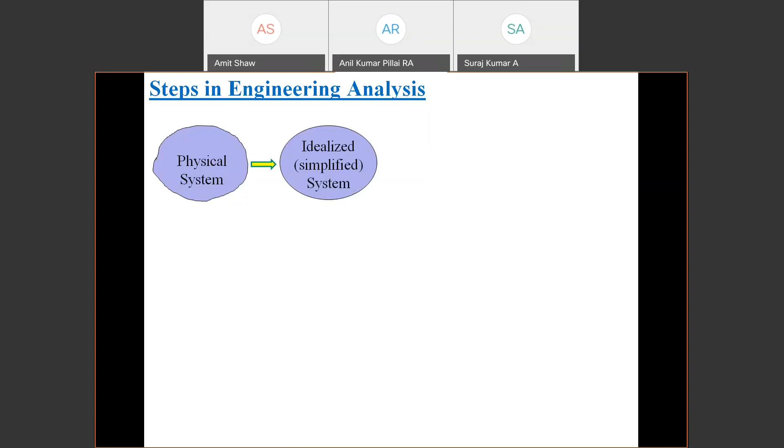Now, once the system is simplified, we express and represent the system through some mathematical model. Once we have that model, then we need to find a solution of that model. Let me put that in a better perspective with an example.

So this is the starting point. Idealized structure is the starting point of analysis. We always start analysis on a beam. We know how to analyze a plate, we know how to analyze a frame. These are all idealizations of some physical system.

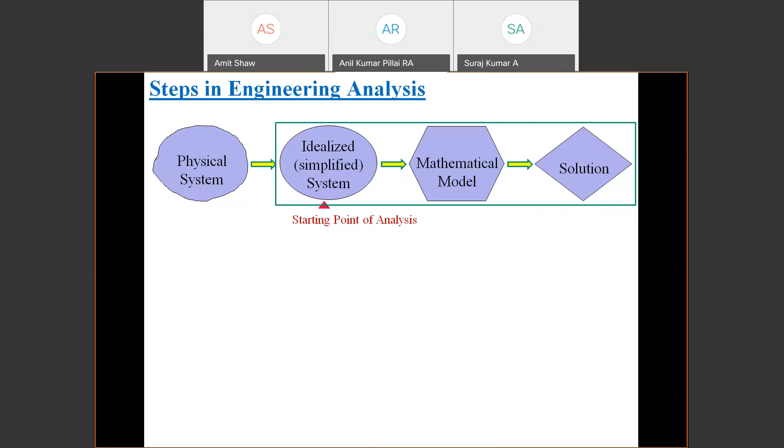Let me give you an example of that. Suppose the physical system is, say in this case, a dam. Then we have an idealized system, the computational model of the dam. Once the system is idealized, we represent it as some mathematical model. In this case, it is the equilibrium equation with some boundary conditions and initial conditions.

And then with this boundary value problem, when we solve it, we get the response of the structure. Response of the structure includes information at various points - stresses, strain - that information we get from the analysis.

Now the important point is when we go in this flow from the physical system to the solution of the system, at every stage we make some assumptions. So when we write the computational model like this, we assume that, in this case at least, the dam is a plane strain problem. So this is an assumption.

Again, from computational model, when we write the mathematical model, we make some assumptions about the boundary conditions, about material property. For instance, concrete - if you look at a mesoscale, concrete is a heterogeneous material, but most of the time we assume concrete is a homogeneous material. So these are all assumptions.

Now again, from the mathematical model, when we solve it, we also make some assumptions. We discretize the entire domain, discretize the equations, and then get the solution. Now, why am I continuously stressing the term assumption? Because assumptions are the limitations of a model, of an analysis framework. Every analysis framework is based on certain assumptions, and these assumptions are essentially the limitations. Wherever these assumptions are not applicable, in those cases, that analysis framework cannot be applied.

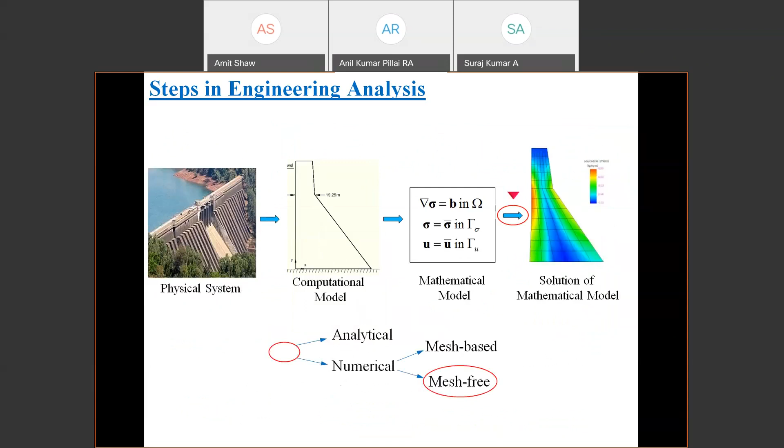So in this presentation, we'll try to address three questions: why mesh-free method, what is mesh-free method, and how mesh-free method works. Why mesh-free method?

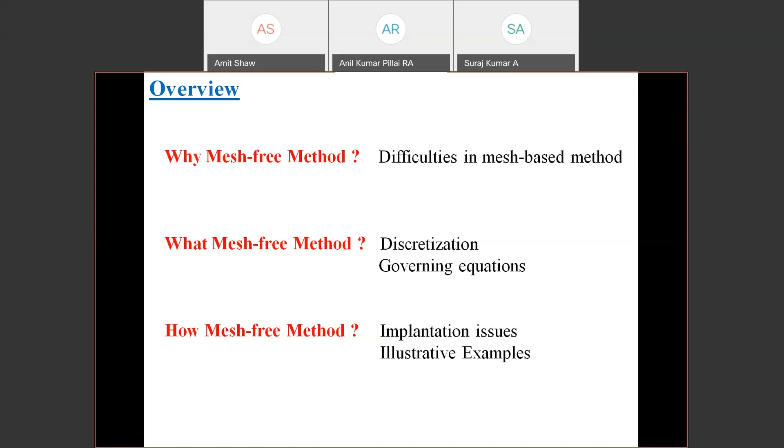We will try to find out sufficient reason to explore this field. We try to find out what are the difficulties associated with mesh-based method, and what limitations we may have for a particular problem when we try to get the solution. Once we understand the motivation, we'll see what mesh-free method is, how discretization takes place, how to solve the governing equation, implementation issues, and then some examples. So let us see why mesh-free methods.

Okay, before that, let me show you some videos. For instance, as I was telling you, with every assumption we slightly deviate from the physical system.

So it is really an irrelevant question whether a model is accurate or not. The very word model itself means it is not an exact representation of the physical system. The question we should ask, whenever we use any analysis or modeling technique, is not whether it is right or wrong, but whether it is useful for a particular context. All models are essentially wrong, but some are useful, and we try to use only those modeling techniques which are useful for the given context.

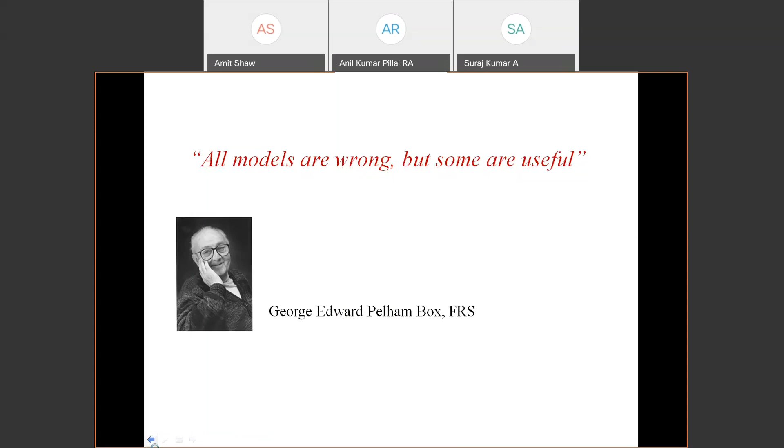Now, to understand the motivation of mesh-free method through a practical example: suppose I want to study and design a structure under blast loading. Before we do so, we need to understand how a structure may respond when subjected to blast. I, or my student, tried to model the entire structure under blast loading using LS-DYNA software. I'll show you what kind of behavior we observed from the analysis. So I'm going to play a video.

I see this video. So this is a bridge. We have taken a small, simply supported bridge, and put some explosive just below the deck, then the explosion takes place. Now, what we'll observe in this video is how, after the explosion, damage initiates in the structure and how the damage propagates, and what happens to the structure as it does.

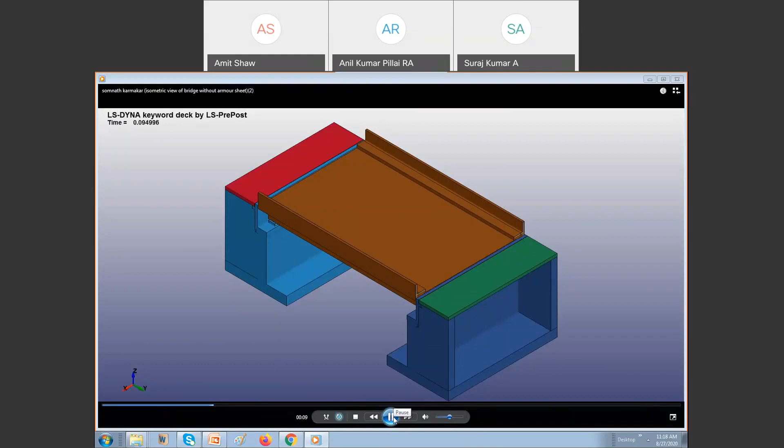These are the damages. They start from here. The initiation location of the damage depends on the position of the explosive, standoff distance, and intensity of the explosive. But for this given choice of parameters, the damage starts here and then propagates, and you can see how it propagates.

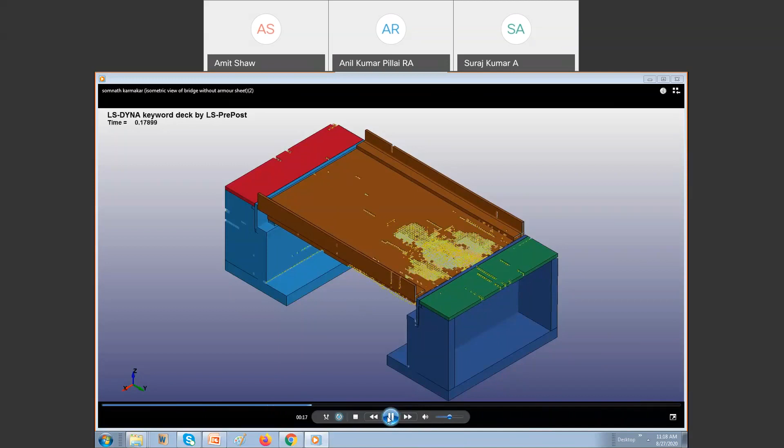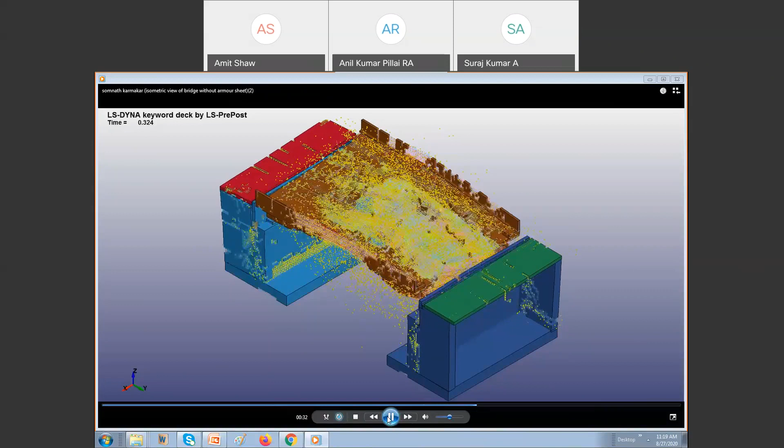You can see all these dots, the yellow dots, which are essentially the fragmented parts of concrete. And if you look at these lines, these are essentially the reinforcements. So you can see this is the way the structure actually responds. This is how this simulation will come towards the end of this presentation.

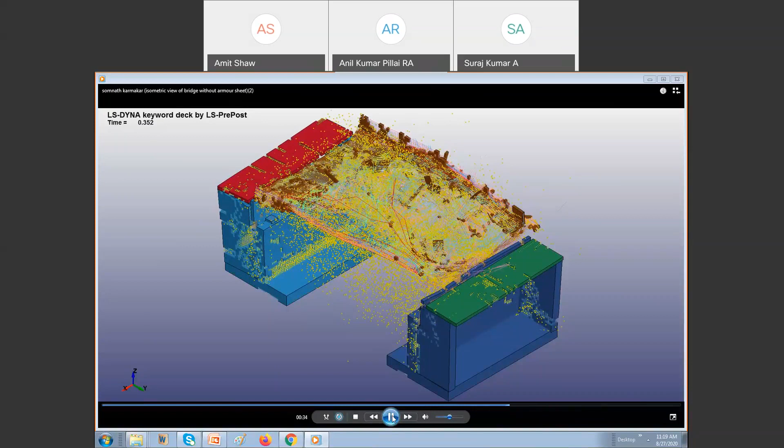But the point I want to make is that whenever this kind of behavior occurs, methods which rely on mesh have a limitation. I believe you are all familiar with finite element method. If you recall the process we follow: we have a domain, a structure, we discretize into elements, but the elements are connected together at the nodes, and they remain connected. We do not allow separation of elements in the classical form of standard finite element formulation. But when this kind of fragmentation or failure takes place...

...then you do not have the luxury of keeping the connection between elements. There has to be a separation between elements. The computational framework used must allow separation of those elements, otherwise you cannot model the structure, you cannot model fragmentation. But methods based on elements really cannot do so easily. They can model it to some extent with additional enrichment, we'll come to that point as well. But by and large, it is very difficult to model this kind of behavior using finite element method or methods which rely on mesh.

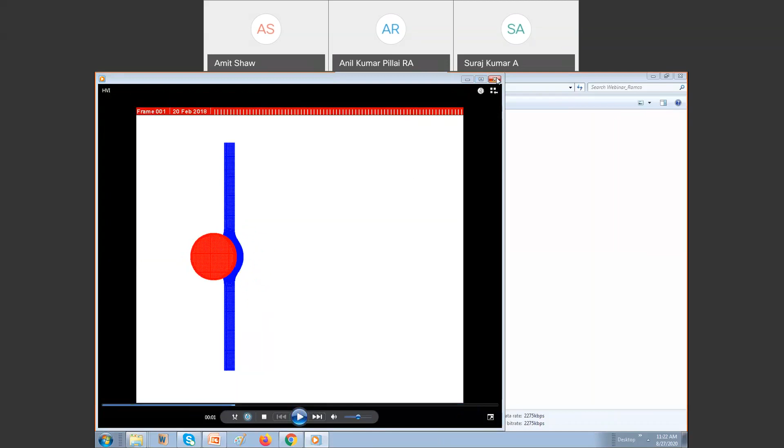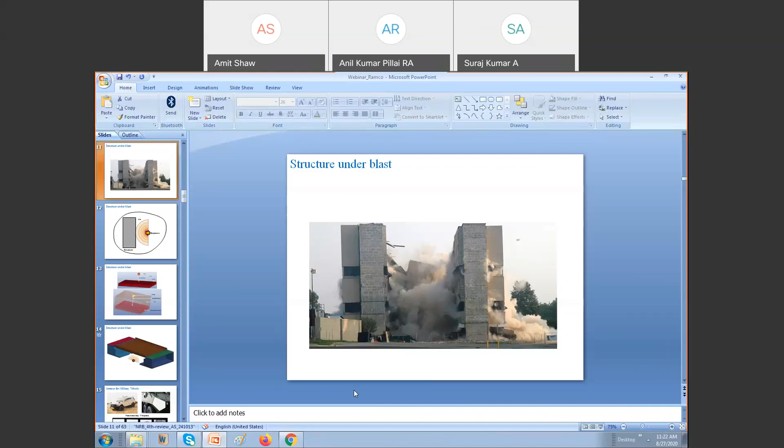Now the point is, in those places it is difficult to use finite element method, and therefore we need a method which does not rely on elements. The choice is element-free method. Remove the element, or remove the mesh, from the formulation, and it becomes mesh-free method. That is the topic of this lecture.

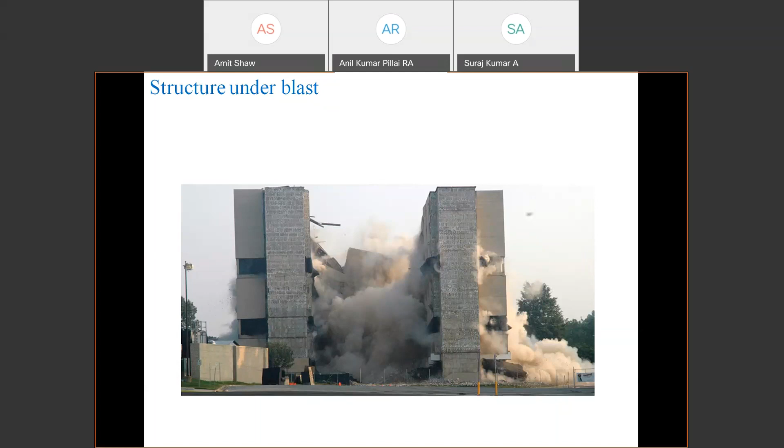Suppose I want to model it. This is the physical system, the actual structure and actual blast. As I said, the analysis step is: we have a physical system, then we need to idealize the system. This is the idealization - this is the structure, and this is the explosive. After the explosion, the shock wave generates and propagates through air and hits the structure, and then the medium is here. So this is our system.

Now there are many ways you can understand this system. I'm just going to give you some examples. Suppose I want to analyze this system - what are the possible ways we can analyze it, some examples.

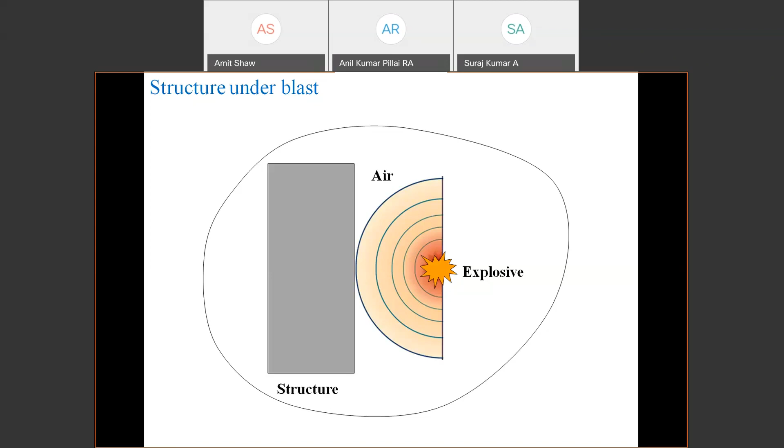The second idea, another idealization, would be to model the structure, air, as well as the explosive. You model the explosive with something, allow the explosion to happen, allow the shock wave to generate, model the air and allow the shock wave to propagate through it, and then eventually the shock wave hits the structure and you get the response of the structure. So either you model only the structure and apply pressure on it, or you idealize the entire system - explosion, air, and structure together - and do the simulation.

But again, what idealization to follow also depends on what kind of response we are looking for. And based on that, whether a particular idealization is useful in that context or not - based on that, we need to idealize.

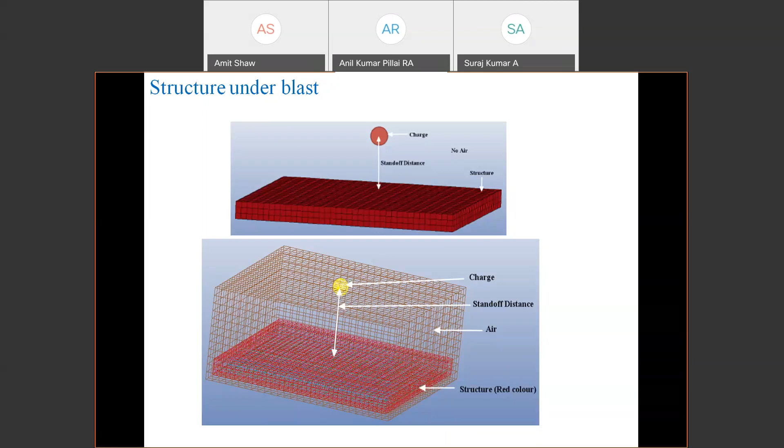Now, this is finite element discretization. The entire structure is discretized with elements, and when we tried to analyze the structure under blast loading, we had a problem - we could not model it. The simulation I showed you is not just finite element; there is another method we use, I'll come to that point. But when we tried to model only with finite element method, it was very difficult to model.

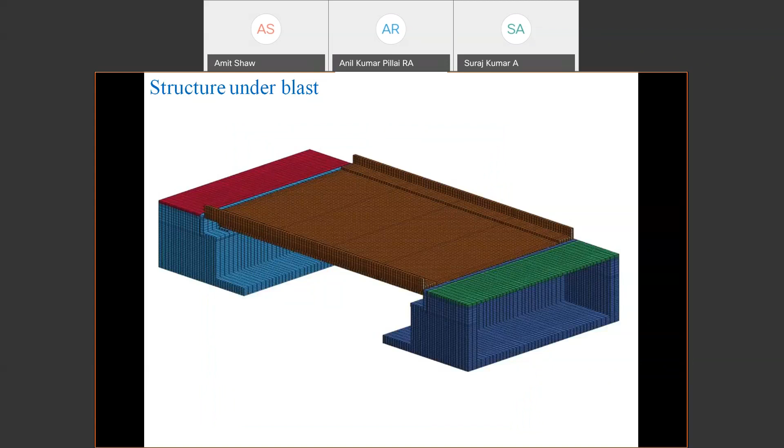Other examples - see, the examples I'm showing are from my interest, but you can correlate similar kinds of problems to many other fields as well. For instance, the armor we use for military vehicles - these armors are subjected to impact of bullets and blast loading. Whenever a bullet comes and hits the armor, there is fragmentation in the armor, failure takes place. If I want to model it for the design of armor, I have to analyze it, I have to do the simulation. But when we try to do the simulation, the classical methods which rely on mesh are very difficult to implement in this context. This is another example.

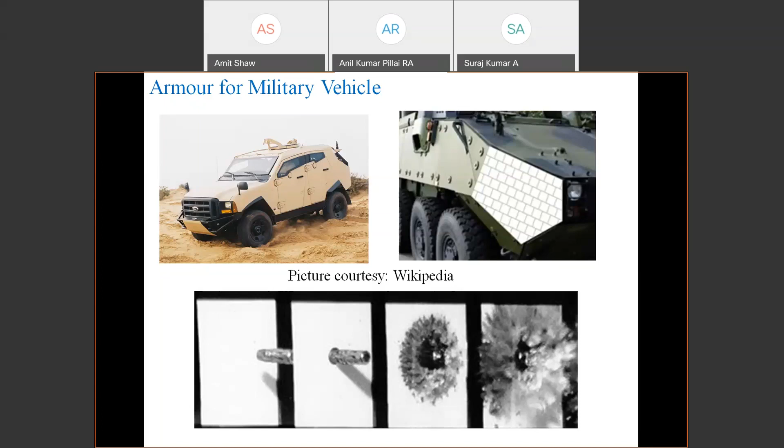Again, you see the example - we as human beings are, popular or unpopular whatever you may say, polluting things, right?

Why is space debris important? Suppose you want to send a satellite into space, and that satellite is hit by space debris. These debris are very fine particles moving at around 10 kilometers per second. At that speed, they may cause significant damage to the structure. So if a satellite is hit by space debris, considerable damage may occur. When we model the movement of a satellite, we need to keep in mind the debris environment - where the debris is, at what speed it may come, what the density of debris is, and whether the area is safe. Otherwise, it will cause significant damage.

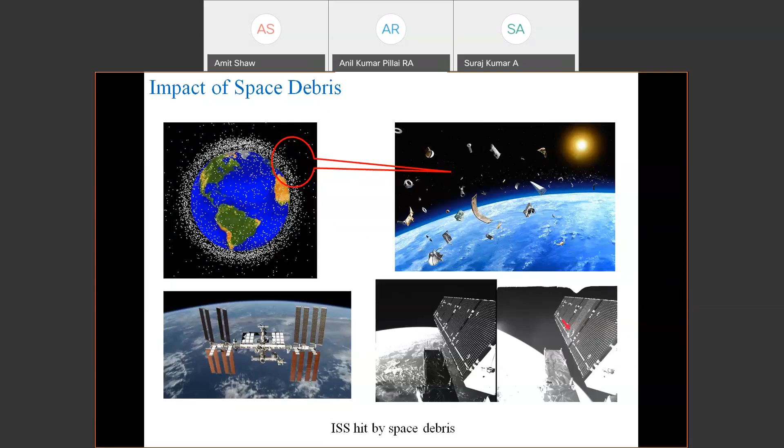Just to give an example, a few years back the International Space Station was hit by a small piece of debris, but luckily it hit the solar panel. You can see a small white dot here, which is the damage caused by the debris. But as I said, luckily it was the solar panel - had it been the main structure, it would have been a disaster.

Another question is how to understand how a structure responds. When we talk about a structure, it could be anything - not just a truss, a frame, or a building. Anything made of small pieces that serves a certain purpose can be termed a structure. So if there is an impact of debris on a structure, how would the structure behave? That information is important, because only with it can we design the structure and design a shield for it.

For that, numerical simulation is important. What methods do we have to numerically simulate it? If we go back to using finite element or mesh-based methods, there is a limitation, as we have mentioned many times in this presentation. So we have to find an alternative technique, beyond the mesh methods that are available.

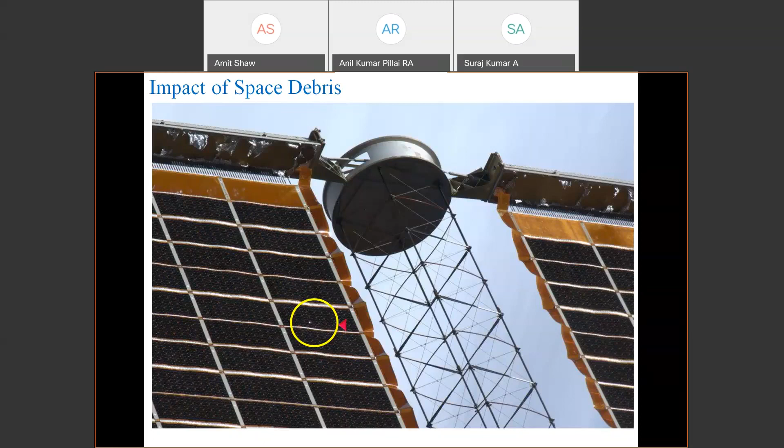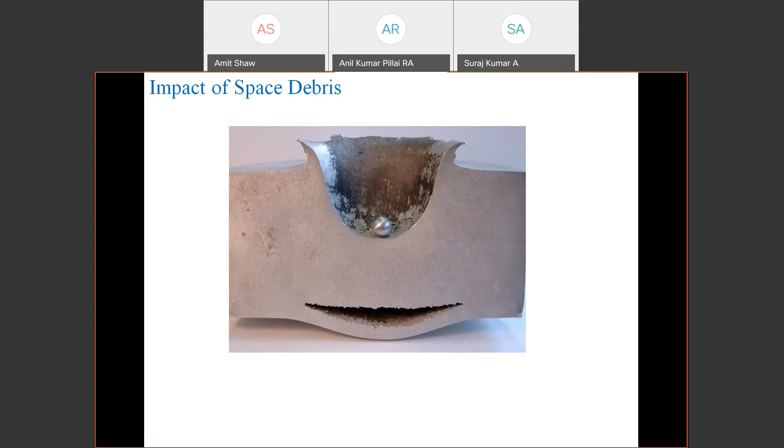The second section I was talking about, a plate impacted by a sphere, is essentially the simulation of this problem - this is the plate, and it's hit by a small sphere. When we do this simulation, I'll zoom into that part and show you the problem. When you try to simulate it using an element-based method, you see there's huge distortion of elements occurring - the elements get distorted severely.

At these points, when you have a severe distortion in the element, the accuracy of the solution suffers. One of the premises in element-based formulation is that the element must satisfy certain geometric criteria. If they are severely distorted, those criteria are violated, and the final solution will be inaccurate. So we have to deal with this distortion.

There are many ways to deal with distortion, but when we talk about this kind of problem, all these techniques fail to address satisfactorily the kind of problem we are interested in.

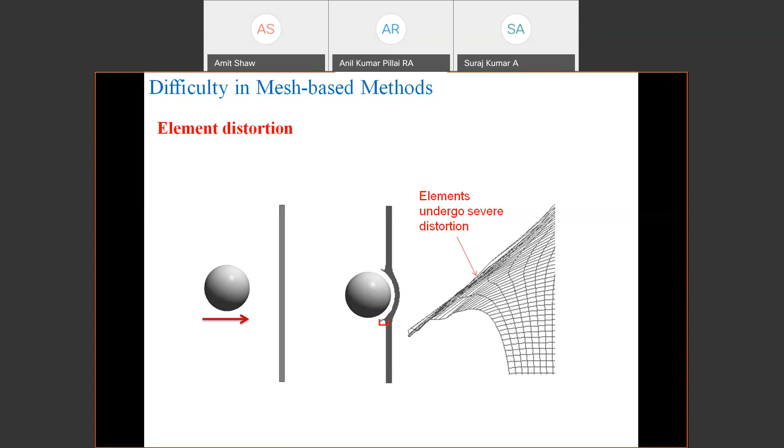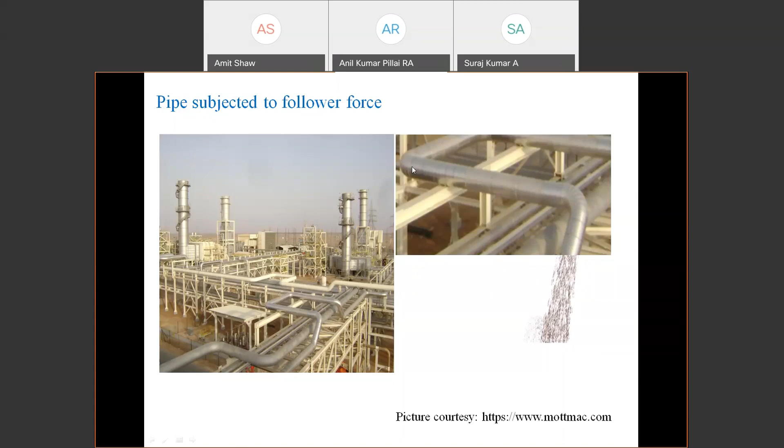Now when we try to simulate it, the simulation will look like this. Of course, a concrete or steel structure would not allow this kind of deformation in reality — it is not to scale. This is the actual deformation that this beam, or this kind of structure, may encounter. Now I want to simulate it.

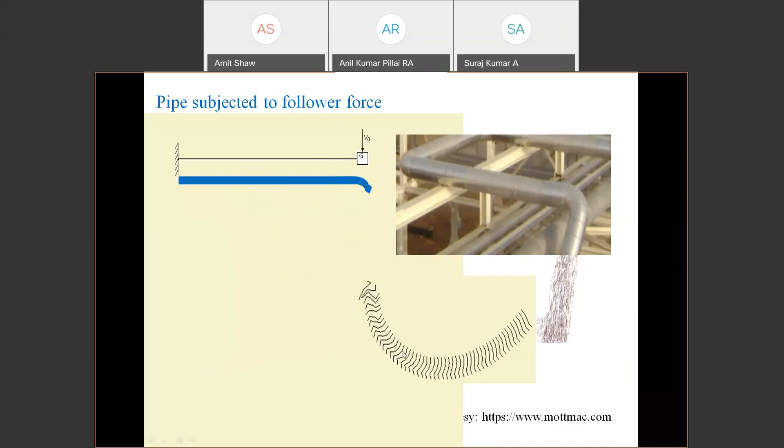But then what happens? You see these lines representing the thickness of the beam — these thickness lines become so severely distorted. So when you try to model it using the finite element method or an element-based method, because of this distortion, you may get significant problems in the computation.

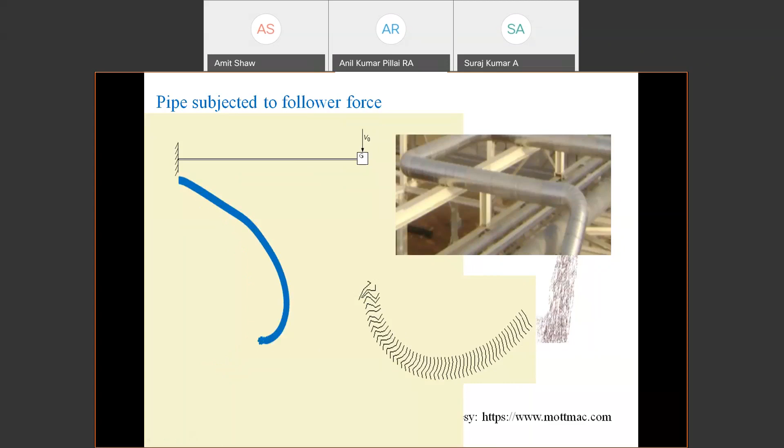So these are some of the motivations, some reasons why we must look beyond the classical technique and explore the possibilities of a different class of method which can be used for certain classes of problems where conventional methods cannot be used very satisfactorily.

Now, before exploring these possibilities — if something goes wrong in our computer, we don't just go to the market and buy a new one, right? We try to repair it. If we find that the computer reaches a state where repairing is not possible, or the repair cost is huge, only then do we think of buying a new computer. So the first thing is always to find a way to repair the framework you have.

By the same analogy, there are some limitations in our computational framework, but instead of looking for a completely new alternative technique, why not try to repair the existing technique and see whether, with that repair, these methods can be adapted to this kind of problem. So there are some repairs available in the literature.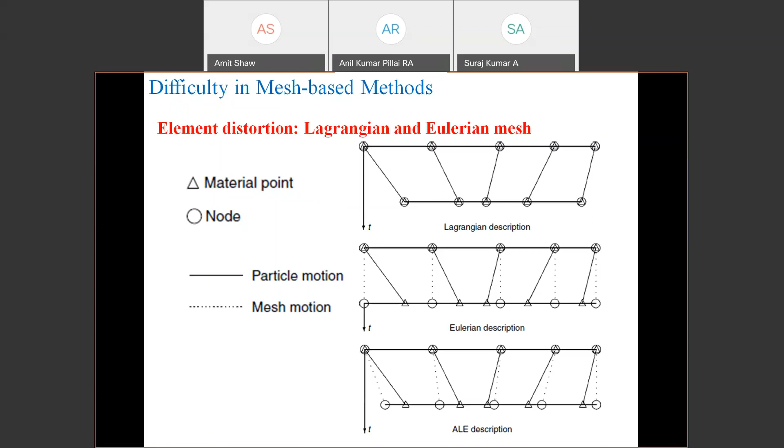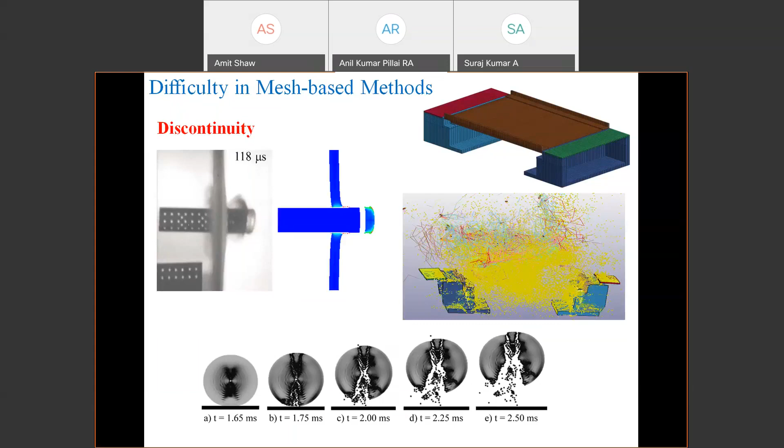Now another difficulty in element-based methods, as I've highlighted several times, is modeling fragmentation, crack propagation, and the discontinuity that the structure encounters. In order to model that discontinuity, there is a technique available in the literature called XFEM, extended finite element method, where enrichment allows your computational framework to have a crack within the element, allowing material separation to happen.

XFEM has also been developed for some time. Some software like Abaqus has a module for XFEM, but we are not talking about one crack or two cracks. We are talking about the example of a structure under blast loading, how damage initiates, propagates, and finally leads to complete failure of the structure, including material separation and fragmentation.

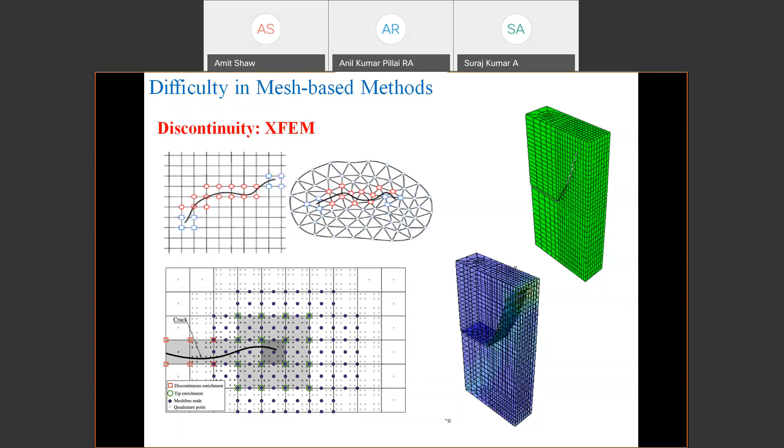Now in those kinds of behavior, XFEM again may not be applicable to those kinds of structures and behavior.

So up to this point, we tried to convince ourselves and find sufficient reason to look beyond the classical technique. The summary is: there are certain classes of problems where conventional mesh-based methods are difficult to implement or apply, and in those cases we need to look beyond this conventional technique. That is why we are doing this exercise on mesh-free methods.

Now let us come to what mesh-free methods are. As the name suggests, mesh-free methods started long back, around the 1970s, and now we are in 2020, so it has been almost 45-50 years. Over the last 40-45 years, several variants of mesh-free methods have been developed.

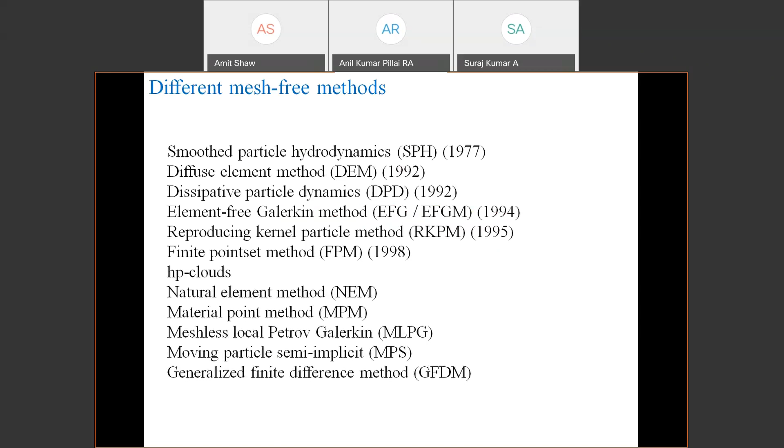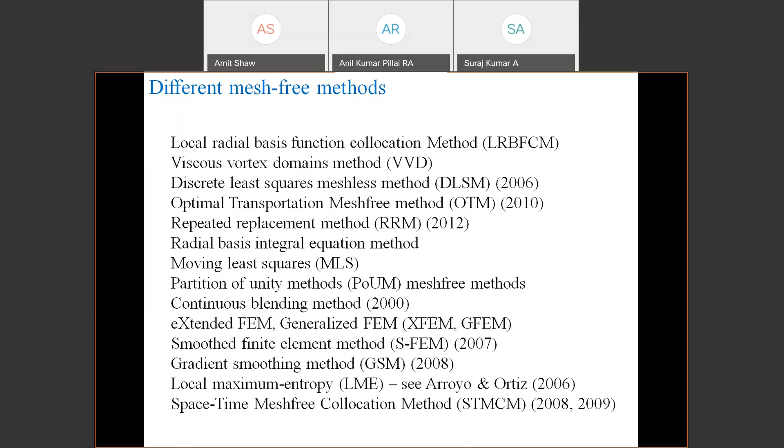I'll just browse through a few names. These are just a small subset of the entire set of mesh-free methods available in literature, but they are not very different from each other—they are all premised on similar assumptions, so there is a common link among them. These methods are popular and widely used in simulations, and commercial software like Abaqus and LS-DYNA have incorporated methods like Smoothed Particle Hydrodynamics, or SPH, as one of their modules. We'll highlight different aspects of this method.

As the name suggests, mesh-free method means absence of mesh—there is no mesh. So we have a structure like this, say for instance a plate, and if I analyze this plate using the finite element method, this is the discretization—the element discretization of the domain.

In mesh-free, we just remove the elements. So in finite element discretization we have elements and nodes, all connected with each other at the nodes. In mesh-free discretization, we remove the elements from the system, so what we're left with is just a set of nodes, or particles—particles being the common term used in this class of methods. So the first difference between mesh-based and mesh-free methods is that mesh-based uses discretization through elements, but there are no elements in mesh-free methods, only particles.

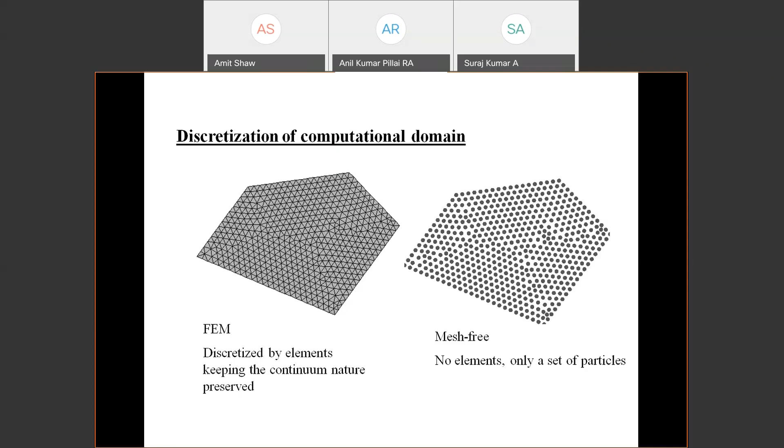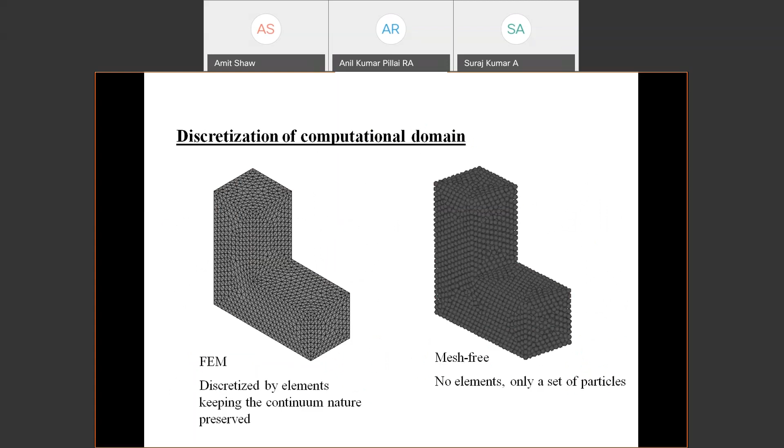Now one point I want to highlight is that when we say it's a beam, a plate, a shell, a column—these are all structural idealizations. There is nothing like beam or column in nature; nature doesn't understand what a beam or column is. For nature, everything is a three-dimensional object. It is for us, for our computation and analysis, that we give this idealization. Now, one important thing about mesh-free methods is that they do not rely on those kinds of idealizations.

Every structure now is a collection of points in three-dimensional space. Once we have discretized the structure by representing it as a set of points in three-dimensional space, the next question is how these points or particles interact with each other in order to have a deformation, in order to get the load transfer from one part to another.

These points must interact. This interaction in mesh-free method takes place through a kernel function, but before that, it takes place in finite element method. In finite element method, we defined shape function.

The shape function essentially gives you, if you have several points within an element, and every point has a variable defined, then the shape function allows you to find out the variable at any arbitrary point in the element. So Ux at the point could be velocity, it could be displacement, it could be stress.

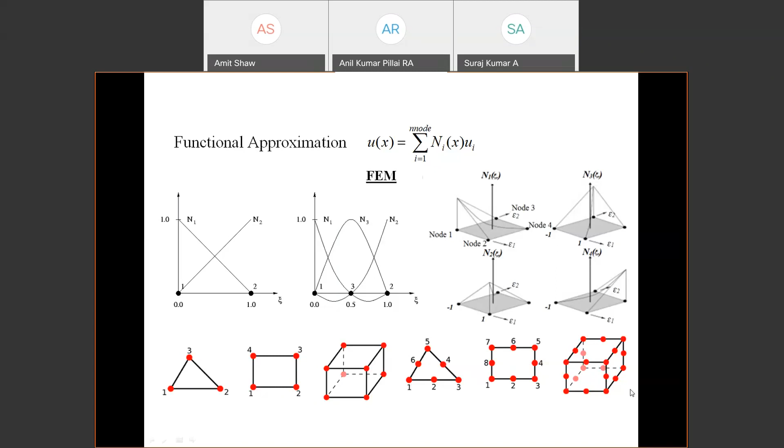Now you see, this is the function, and these are the points, and these points will interact with each other. It is very similar to finite element method, where ui's were the values at the node, and instead of wi's, you had Ni's as the shape function. In mesh-free method, ui's are the values of this particle, and wi's is the kernel function.

This is the kernel function, and ui's give you the value of any function at any arbitrary location. So this is how any field variable, displacement, velocity, or any field variable, can be represented.

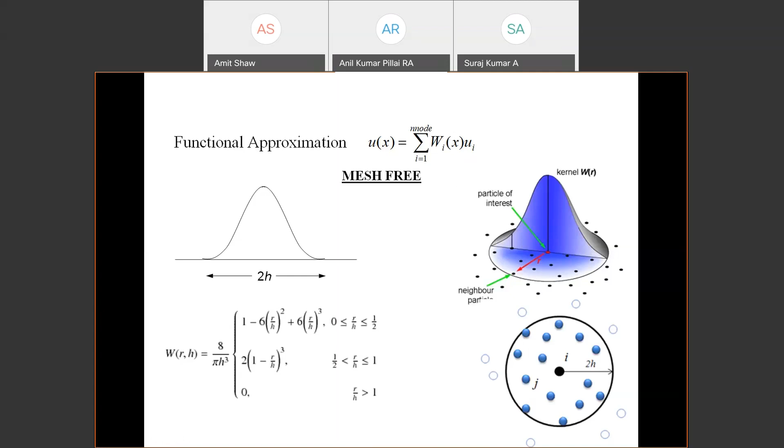So now in a domain you have several points. Wherever you want this interaction to happen, you take the kernel function at that particular point. One point will interact with its neighboring points. One point will not interact with all the points within the domain, only with the neighboring points.

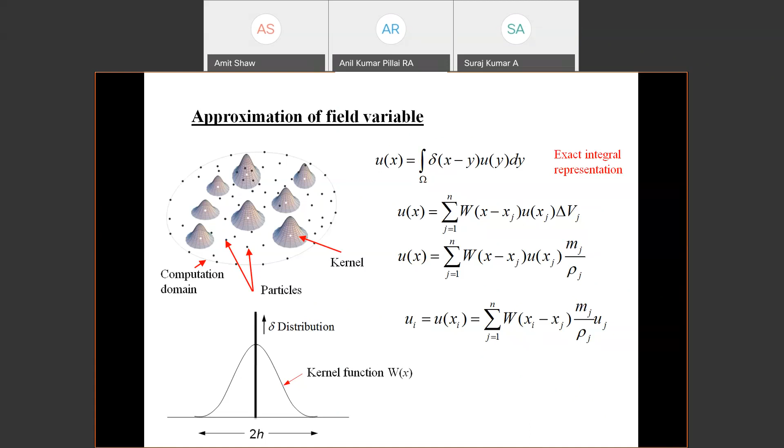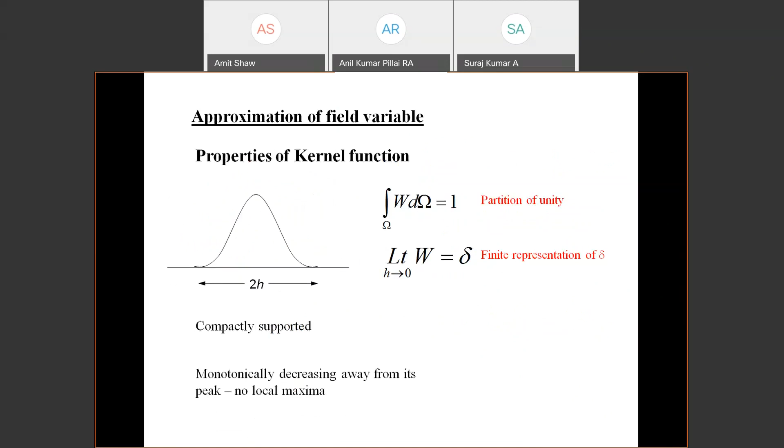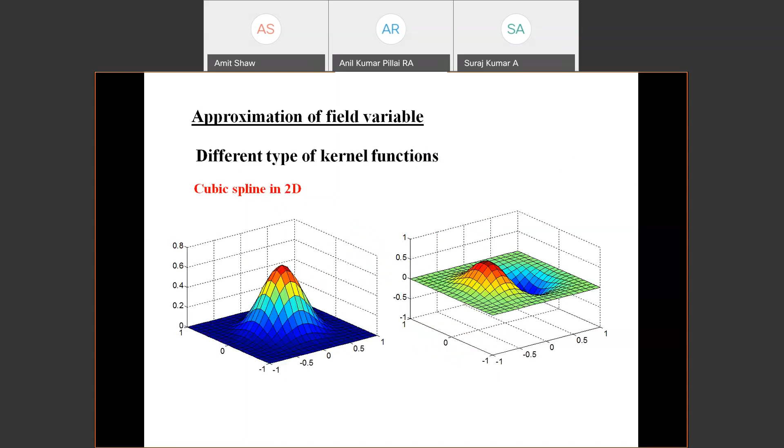So again, if we recall the flow in engineering analysis: physical system, then idealization, mathematical model, and the solution. Physical system we had idealization. Now in mesh-free method, every physical system is idealized by a set of points in three-dimensional space. Once that idealization is done, the next thing is the mathematical model. What are the mathematical models? The equilibrium equations, the conservation equations: conservation of mass, conservation of momentum, conservation of energy.

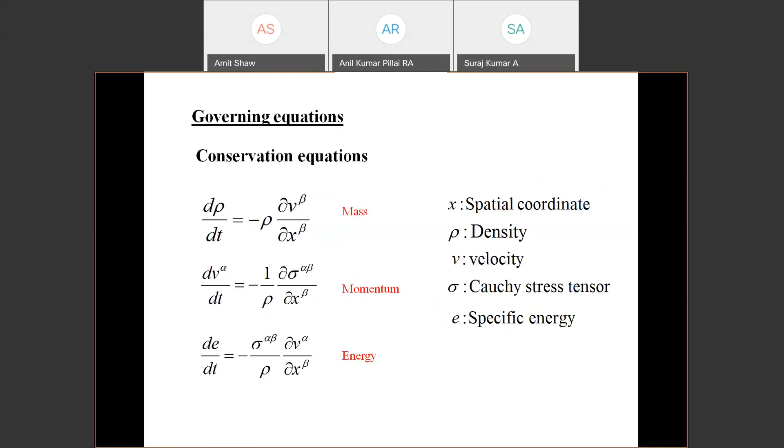The derivatives in the conservation equation can be represented by the kernel function, the same way it is represented in finite element method. Let us not go into detail of this equation. Our idea is to get an overview of this method.

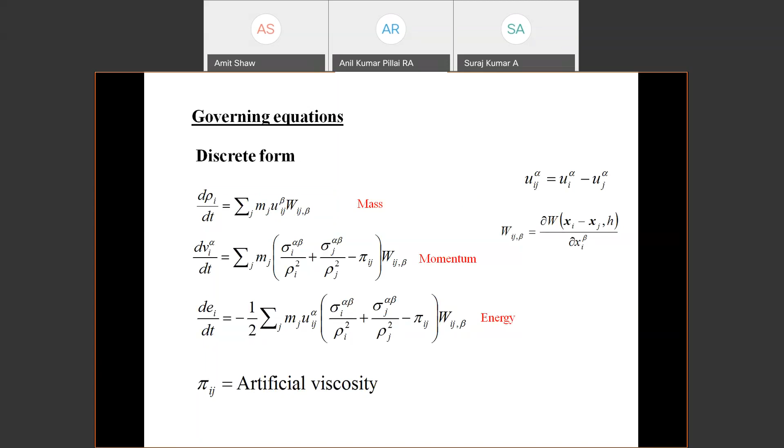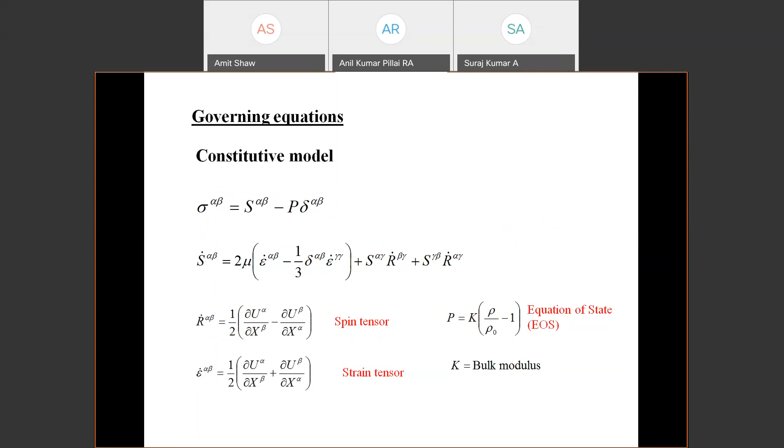So finally, when you substitute all these expressions, along with your conservation equation, we need a constitutive model. What is constitutive model? It is the relation between stress and strain. If you apply a load on a structure, stress and strain are generated, and then how the stress and strain are related to each other.

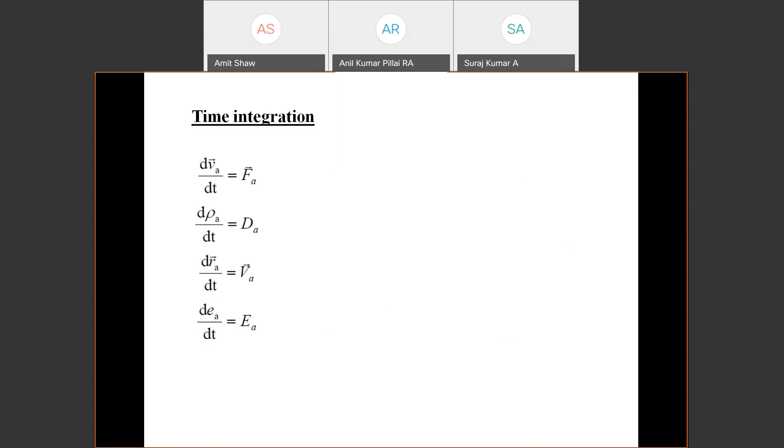So once you have this model, then finally you have to integrate over time if you are doing some dynamic simulation. Let us not go into the detailed intricacies of the mesh-free method, which took several decades to develop. We do not really expect to discuss everything in a one hour lecture, but the idea here is to have an overview of this method, what kind of simulations it can handle, and what is the capacity of this method.

This is one example called the Taylor bullet. It's a very straightforward example. You have a cylindrical rod, and the cylindrical rod impacts a rigid wall, and finally this cylindrical rod deforms like this. The red is the finite element method, and the dots are the simulation results.

The reason I showed you this is that these simulations can be done using finite element based methods, but we should understand that for a problem where a solution can be obtained from mesh-based or element-based methods, if we apply SPH to those problems, what is the quality of the solution? The solution will form, and this is just to show that they match closely.

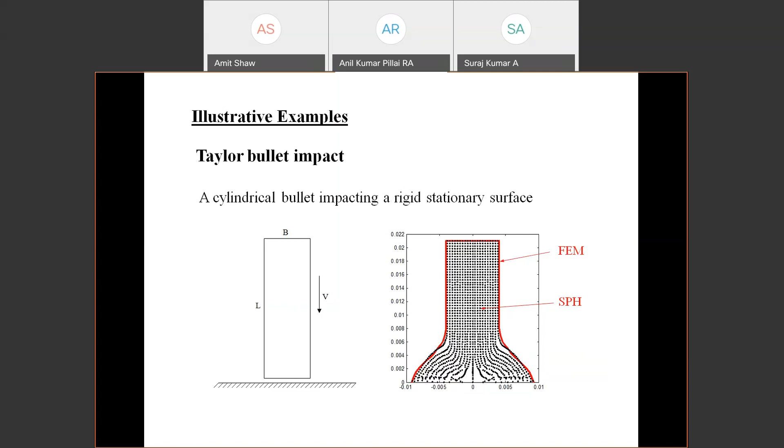Now these are examples that actually show the real capacity, the real capability of this kind of penetration modeling.

If I have to give you a physical example of this problem, this is a very common problem in the oil industry. Suppose you want to make a drill into the earth's surface, for oil exploration or any kind of exploration - this is very common in mining too. Once you make a drill, you want a certain kind of trajectory - at what speed I send the impactor, at what speed I allow the impact to happen, so that I get a certain kind of penetration. If you want that kind of information, we have to simulate it.

We cannot model the entire earth's surface, but we use a domain that can fairly represent the earth. If waves are generated from here, the wave doesn't get reflected, so it fairly represents the earth's surface. These are the penetrations at different impact speeds.

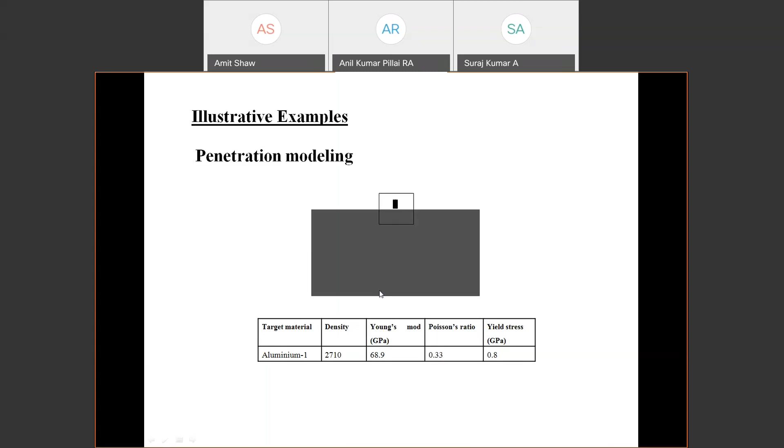The first one is 1 kilometer per second, and as you can see, this is the penetration. This penetration is very difficult to model using analytical methods - some simplified empirical and analytical methods are available for the depth of penetration. When you compare the results of this information, you can see they fairly match.

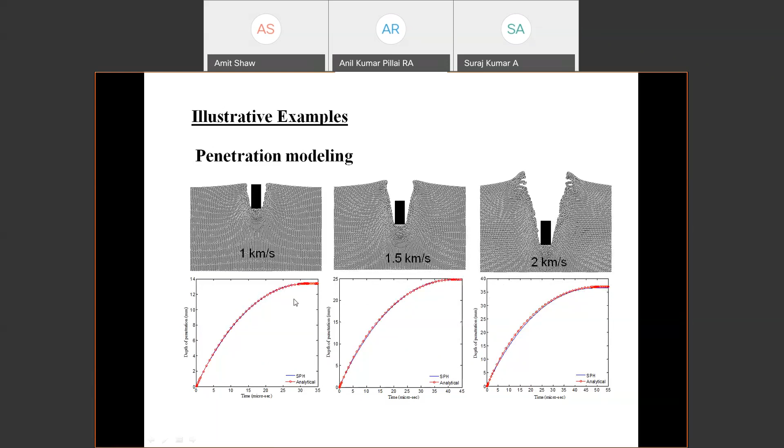This is the problem I was talking about - I was giving an example of a pipe network system. This is a very classical problem called the Parkes problem, introduced by Parkes in 1950, almost 70 years back. But this problem is still relevant because it is a very good example for exploring different classes of methods. This is the result obtained from SPH.

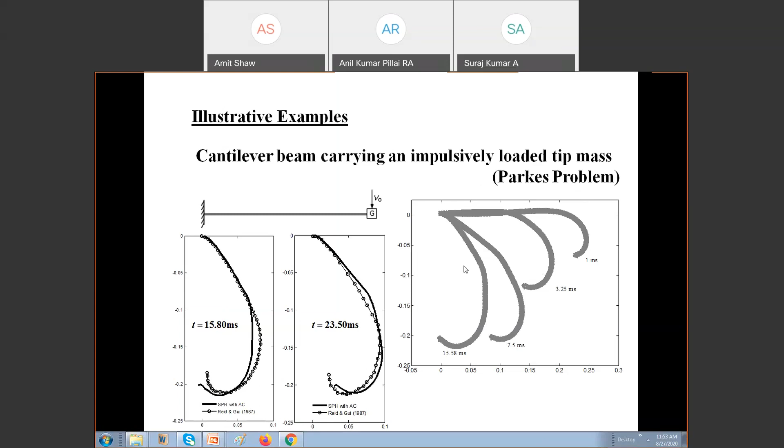Now we are interested in modeling cracks and fragmentation. Let us see how crack and fragmentation can be modeled in the SPH method. You have a set of particles, and every particle interacts through a kernel function. We have used a concept called pseudo spring analogy, which was developed by one of my students.

The idea is to consider a spring between each particle. As the particle structure undergoes deformation and damage initiates, the spring also accumulates damage. When the damage reaches a critical value, the spring breaks, indicating crack formation - material separation has taken place. It's called a pseudo spring because these springs don't contribute anything to the stiffness of the structure; they're only used to check the level of damage and determine whether particles interact or not.

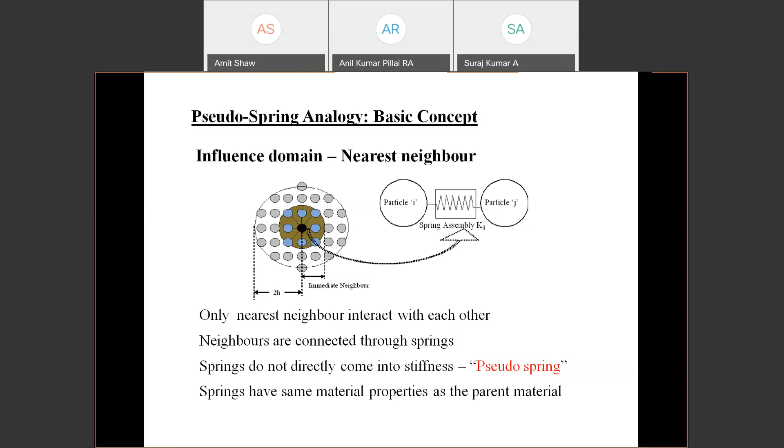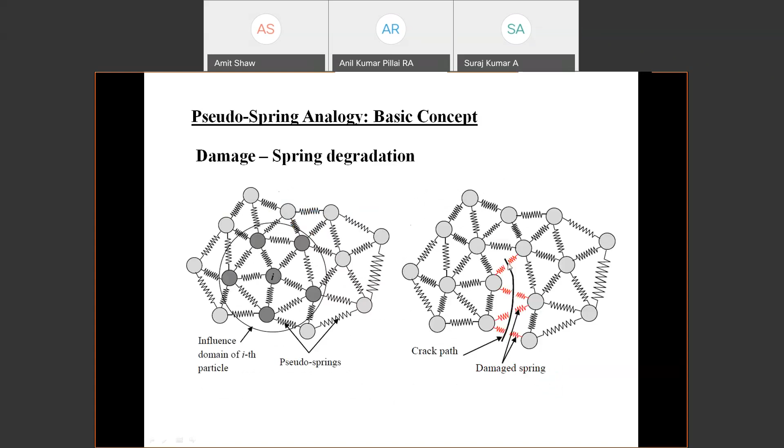So these are particles connected through springs, and some of the springs are broken - this series of broken springs gives you the crack path. This is just one example of how you can calculate the damage of the spring. Damage can be defined depending on the material, and it can be defined in many ways.

Now, this is one way of calculating the strain at this point, and if your criteria is strain based, which is not a very accurate criteria but just giving an example, then damage is defined as this, and if this damage value reaches a critical value, which is 1 in this case, then the spring is broken.

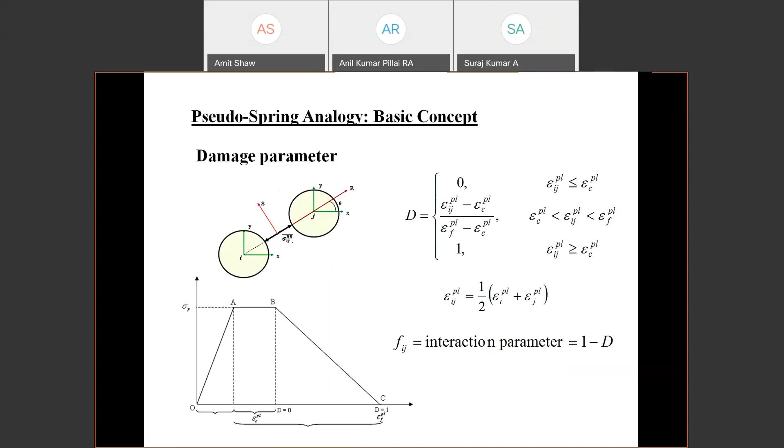Okay, so let us see what is the capability of these methods.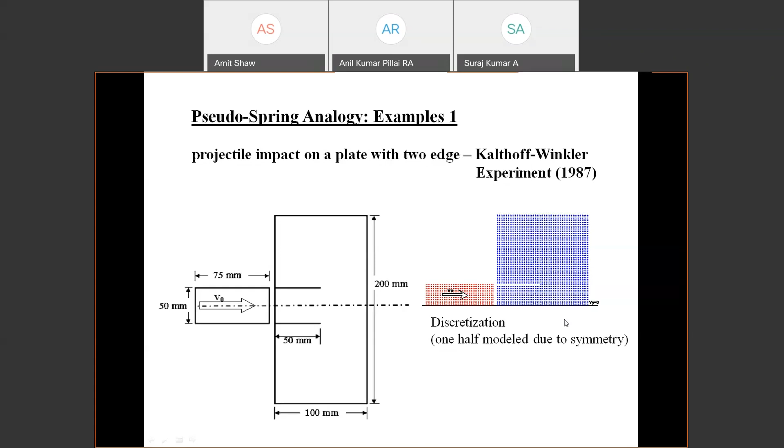Now you see these dots are the crack paths obtained from the simulation. From the experiment, it was observed the crack angle is around 70 degrees, whereas what is observed through simulation is around 67 degrees, which is quite consistent with the experimental observation.

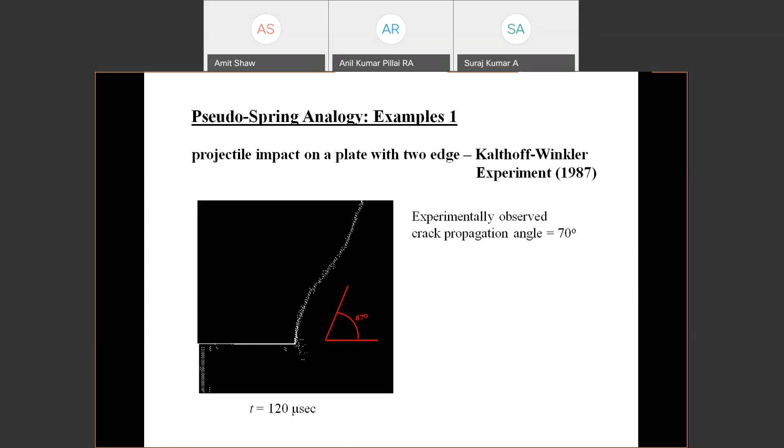Now, this is another experiment done by Ortiz in 1999. This is a supported concrete beam. We have a notch at the center, and in this case, with an eccentricity, and this beam is hit by an object at the mid-plane of the beam.

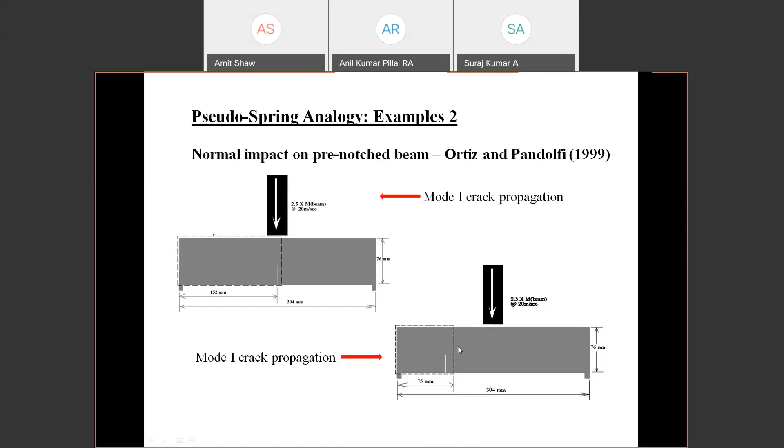In this case, by intuition, we can say that after the hitting, the crack starts from the tip of the notch and then propagates vertically. In the second case, by intuition again, we can say the crack forms again from the tip, but then the crack is not vertical in this case, the crack will be inclined.

So these are the patterns obtained from the SPH simulation, which are very consistent with intuition. In the first case, the crack propagates vertically, and in the second case, the crack is inclined, which is again verified through the experiment given in the paper by Ortiz.

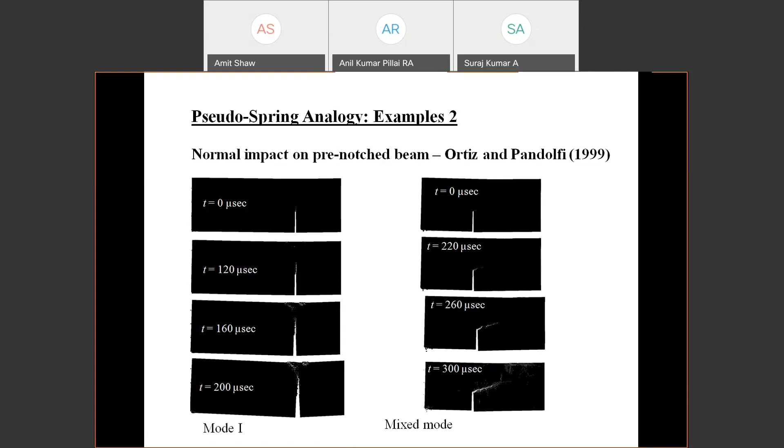This is another experiment, the clamped beam, again hit by a projectile. Experiment done by Chen, and it was an aluminum beam.

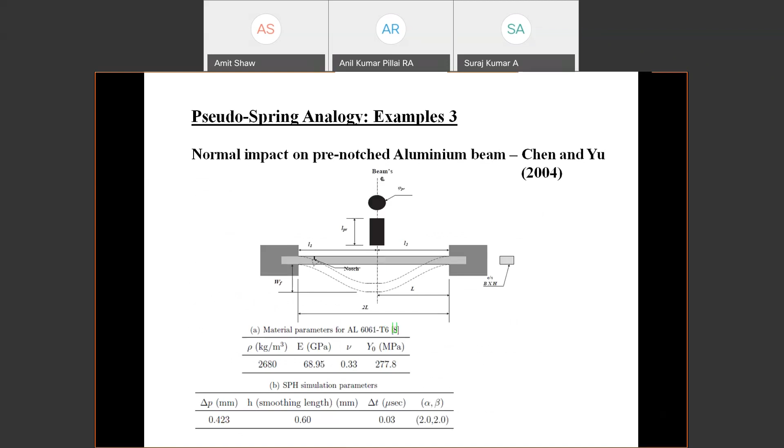So you see, this is the final deformation at different speeds obtained from simulation and obtained from other analysis, and we can see that it is quite consistent.

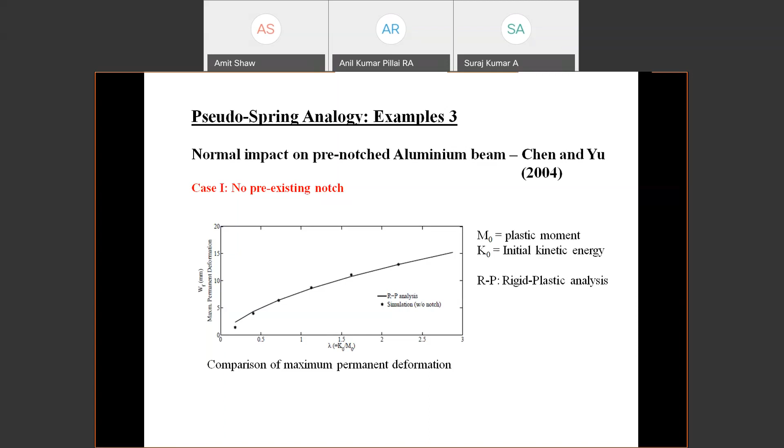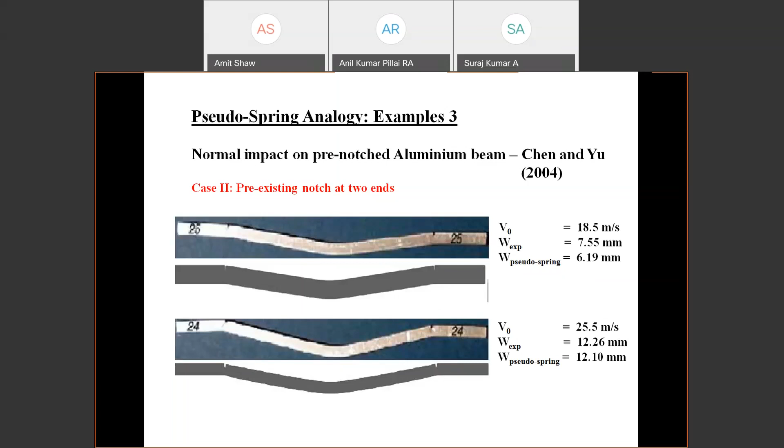These are interesting. The first figure is obtained from experiment, and the second figure, just below the first figure, is predicted from the numerical simulation. So if there is a notch at the fixed end, clamped end, these are the deformations. Now these deformations are again quite consistent with the experimental observation, and the predicted response is very consistent with the experimental observation.

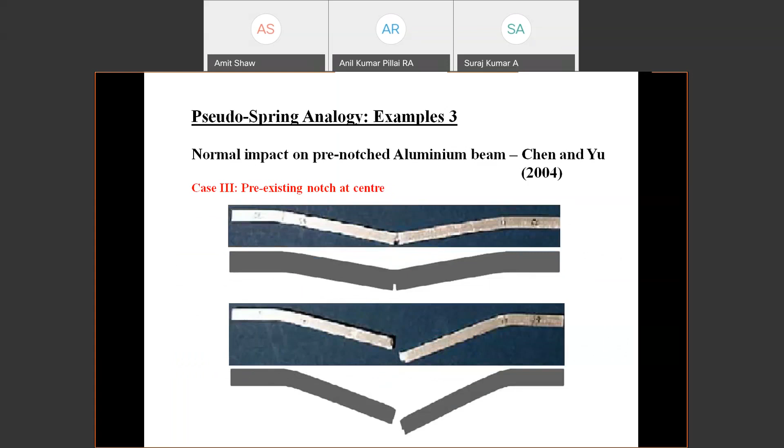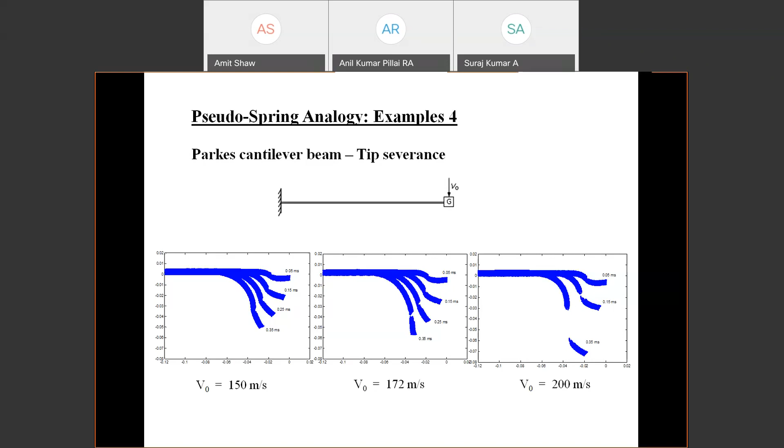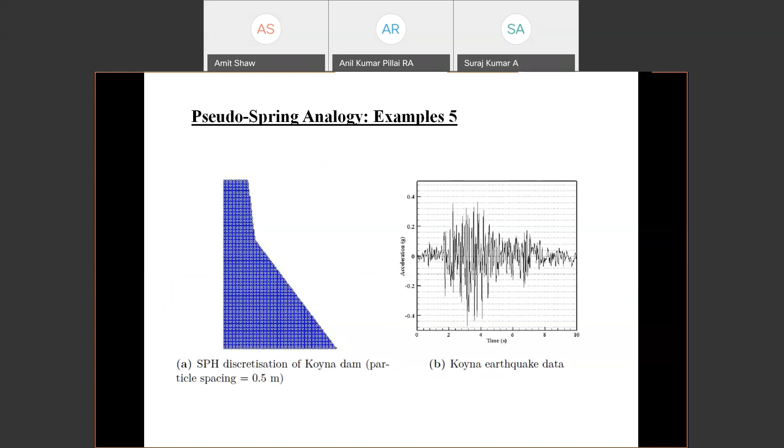But to get this crack pattern in element-based methods, you have to do a lot of additional things like enrichment with XFEM. But sometimes with those enrichment techniques, it becomes very difficult to model interaction of cracks when the number of cracks is very large. But these methods are naturally equipped to deal with or handle this kind of situation.

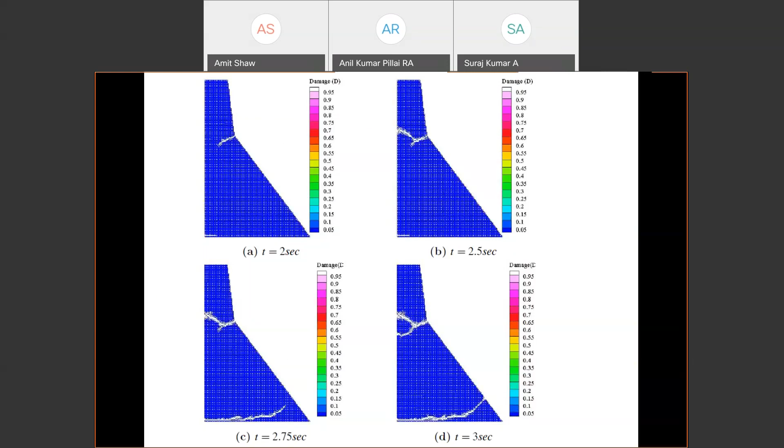Okay, so let us finally summarize what we have discussed. As I started with, what is this? Idealization is one of the important steps in any engineering analysis. If you see the physical system, then idealized system, mathematical model, and the solution. Idealization, representation to a mathematical model, and simulation, we call together structural analysis.

If you're talking about those class of problems, some of the methods which are very well known, widespread, name a field, whether in engineering or science or some other field, there is an application of element-based method. But even in all these, there are a very small set of problems where the application of those methods is very difficult. In those problems, we need to look beyond the classical modeling technique.

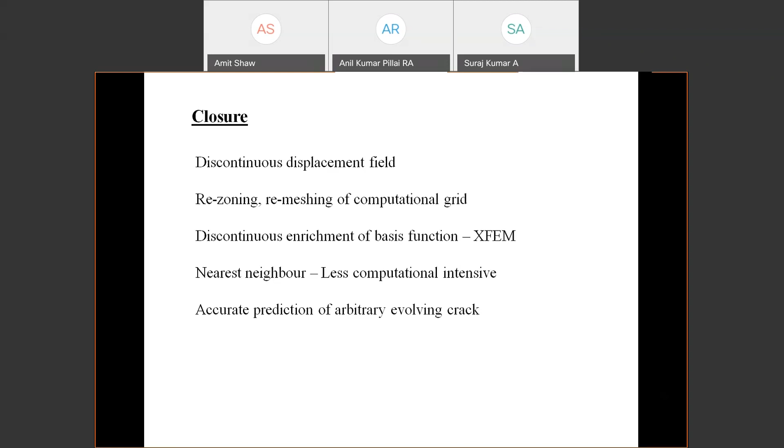And if we can develop a computational framework with that concept, this framework indeed has potential to deal with this class of problem. With this, I stop here.